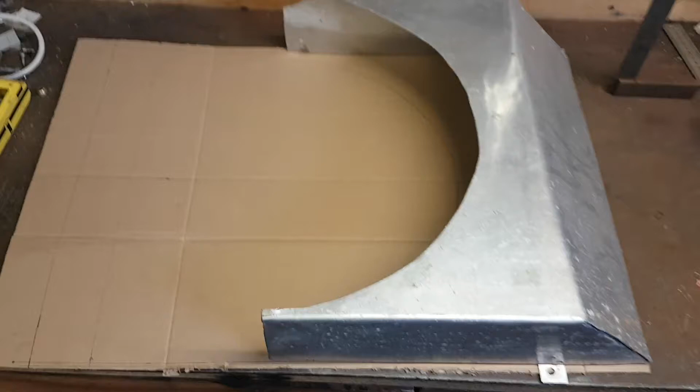I've measured the radiator up. The top of the core is here, and the bottom of the radiator is here, and the bottom of the core is here. The fan actually comes down a little bit beyond.

So this is roughly where the fan is based on the cutout on this. I just laid it on backwards. I might go out and see if I can get a better measure and draw on the fan, but I have a feeling the fan will go down below the bottom of the core.

I've got space, I can get down to here. That's a little bit clear above that - there's a plate at the bottom of the engine bay below the radiator that I've got to clear.

So I'm thinking this was my first attempt at a cowling, all dirty because I never got it to a point where I was satisfied to worth cleaning. When I did this, I had to bash this over the edge of this bench here to get a corner on it.

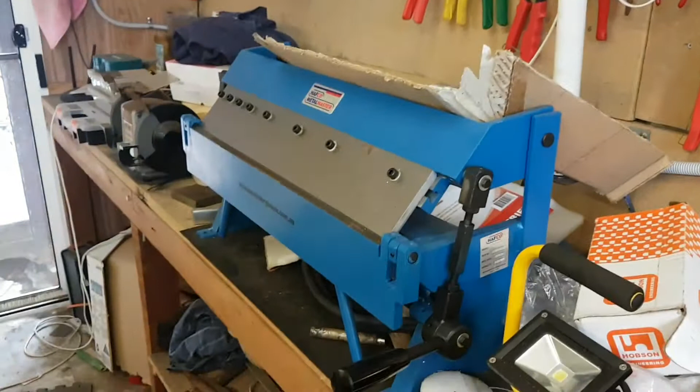Since then I bought that, so I've got more material, and I'm thinking I'll remake this and get it tidier so that's a cleaner line. It's not too bad, but it's not as good as it could be.

When I did this, I had to cut that slightly offset and bend this out a little bit, and I'm not quite sure why. But I guess there's no reason to think the fan is actually exactly on the centre of the radiator - that's just an assumption based on don't know what.

But now that was made, and that was necessary to get it to clear the old fan before I put a spacer on. So the fan has moved forward by probably 70 millimeters now, and so I'll have a rethink of this.

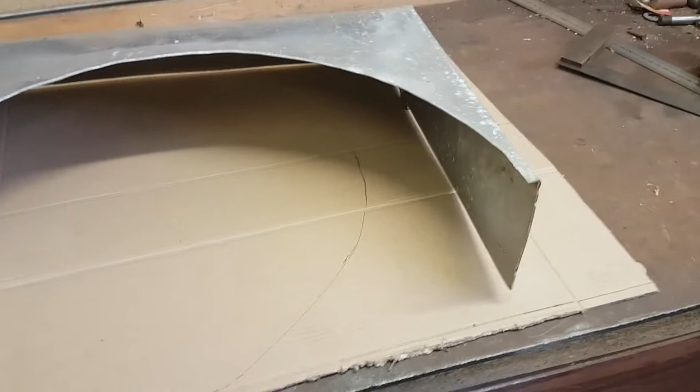I'll go back and check, because it might be that the fan comes past that edge of the radiator and I might have to put a little bulge on it, but I only had the top covered previously.

I'm not sure, it looked like it must have been doing something, because when I did the smoke test just then without the cowling on, it didn't seem to be anywhere nearly as effective.

So I'm not sure, but I will see if I can make a two-piece cowling so that I can enclose the whole thing and make sure all the air coming in is coming through the radiator and not from underneath. And we'll see if we can.

I checked and the temperature did get up a little. I think it warmed up quicker than when I had the cowling on.

So I'll now go and have a look and check to see where that fan sits in relation to the radiator, and I'll draw the fan position onto the cardboard.

So now I have a template, and I have here my cardboard mock-up of that, and I'll use that again, I guess, or maybe I'll cut another one because it's all a bit bent in the wrong place, and I've got some more cardboard down here.

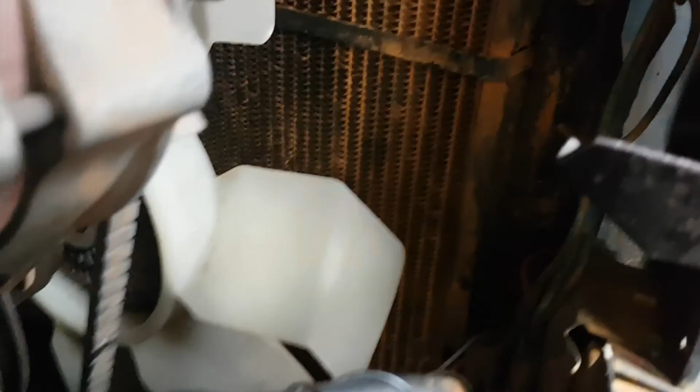I'll see what I can do to get a complete cowling. If we look on this side, there's maybe 15 millimeters clearance on this side, and we go around to the other side, and it is pretty well lined up with the edge of the core.

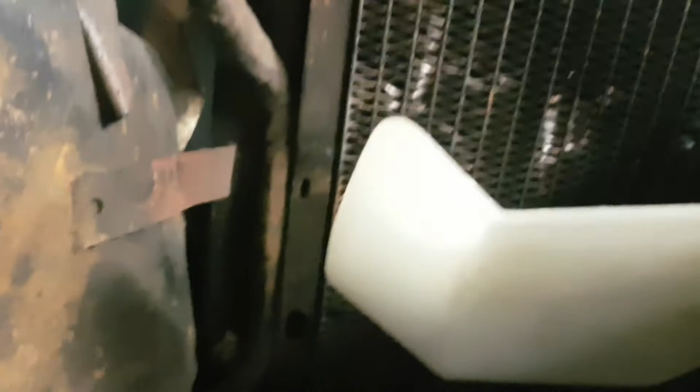It's hard to see, but it actually does line up. The camera - yeah, so we can see there, that's pretty well lined up.

And on the other side - got to get the camera lined up properly. It's actually about 15 millimeters in. It's hard to tell with this, but it is. It's about 15 mil in.

So that makes sense of what I see on the cover. I'll have to take that into account when I'm making up the new one.

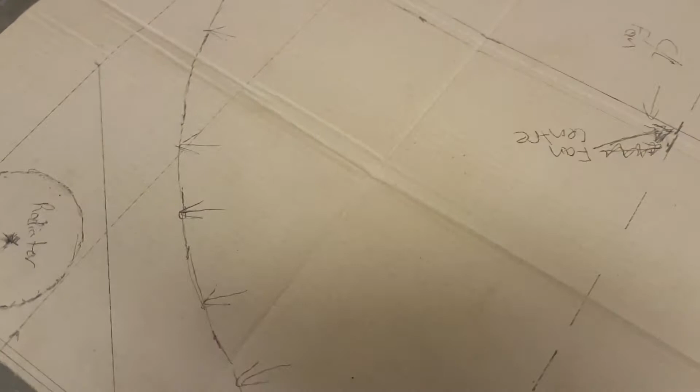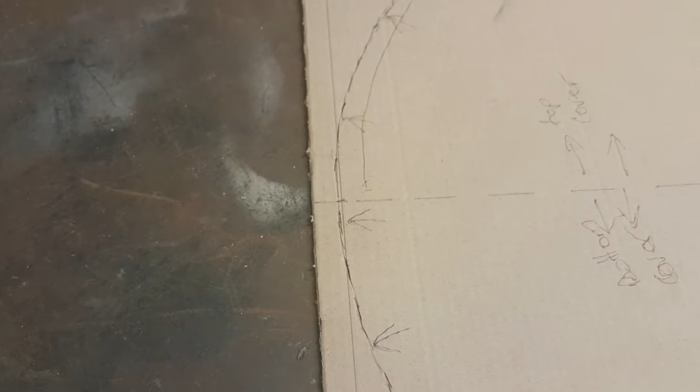The cover is sitting out 100 millimetres off the sitting back, 100 millimetres deep. So I'm looking at this, and if I come back 110 mil here and here and put a 45 on there and then follow that shape, that should be right. I'll have to be careful here, and I might have to make a little deviation out here to have the fan miss that. I think it pretty well lines up with that edge of the radiator, so I may have to give it a little diversion out up here.

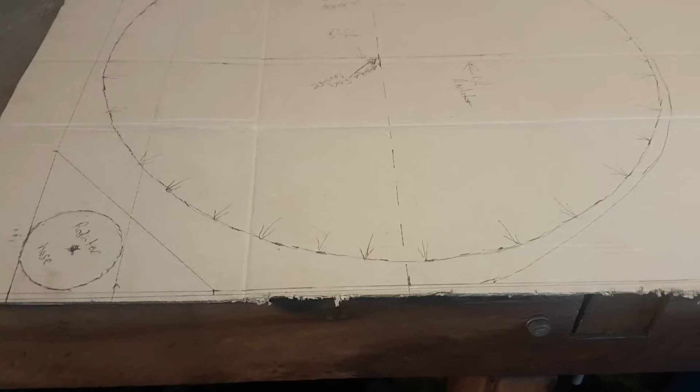This is easier to work on than trying to measure it all up in the engine bay. So I'll see where I go from here. This is the first run in cardboard.

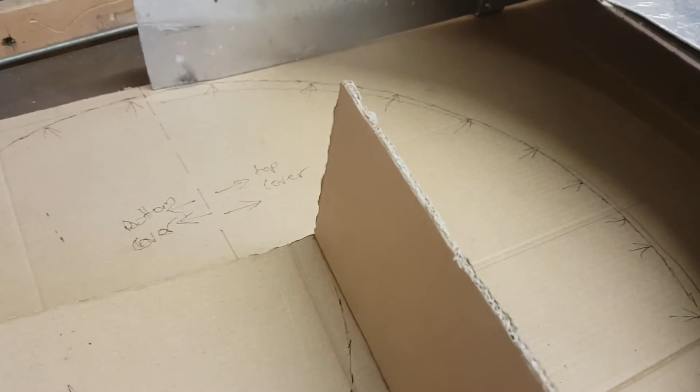That corner there takes care of the radiator hose, and I've got this drawn with the fan. It's pretty well touching the side here. I'm deciding whether I'll puzzle that out beforehand or make up this little piece out here, fold it out maybe a centimetre up here somewhere, or maybe one centimetre out, and then have a piece that just dog legs across, out, back and in to take care of that close clearance here with the fan.

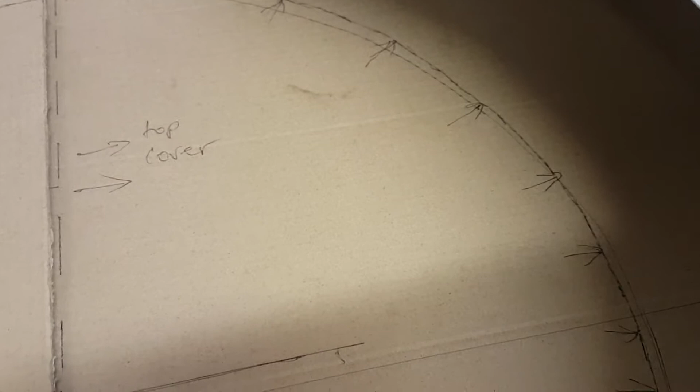But that looks like it's in the right sort of territory. I've drawn in the fan there. I'm holding off - that's offset. If we go centre line of the cowling, that's offset the wrong way because that's reversed. But that is looking like it's in the right territory.

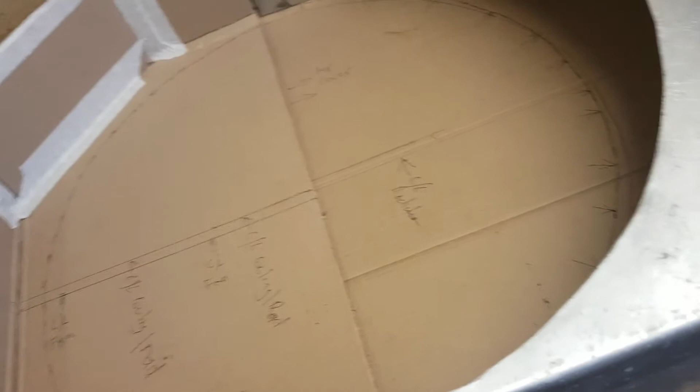So I'm nearly ready to start thinking about cutting some aluminium, and I am inclined to remake that. I've got enough material to do it, and I should be able to make a tidier job of it with this folding machine than what I did on this one. So let's see how we go.

It's a new day, and I'm sitting here looking at this and pondering exactly the best way to make it, because I've got to make sure that I can bend things in the right directions.

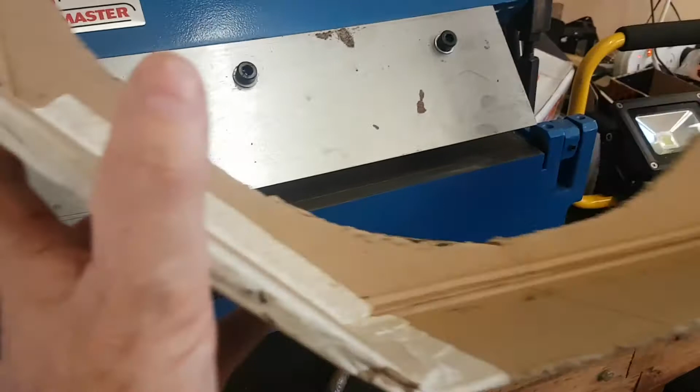So I might even remake or recut this in cardboard and try and fold it in the machine and see if I can come up with a way of doing it that doesn't involve riveting the whole thing together. There's going to need to be some rivets regardless of what I do, because of the way I've designed this - that's got an overlap here and an overlap here, and there have to be rivets in the corner here. So I guess it's a matter of where the rivets are.

That's going to be down sitting like that at the bottom of the engine, and if I do it this way, I can have no rivets in the front here. I would have rivets in the side there, but I've got to have rivets either along here or along here if I do it as I've done it here, or rivets up here if I rivet that in. So actually, I think I might do it that way.

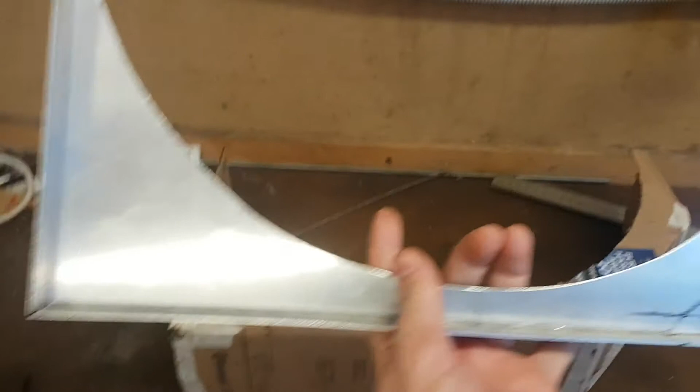The old adage, measure twice, cut once. I cut that corner. This had come up fairly well, although I forgot to allow for the thickness of the material when I was bending it. So I marked it out, cut that corner off, and it's the wrong corner. I can't see that bending that out and switching it around the other way is going to work - it'll probably break off. So I get to do it all again.

After a second attempt, I got this all together with the cutout on the correct side, and it measures up quite well.

Kudos to all those sheet metal workers, because trying to get these joins to sit right - and since you can see them even though it's under in the engine bay, I don't want great deviations and lumps coming out here and so forth.

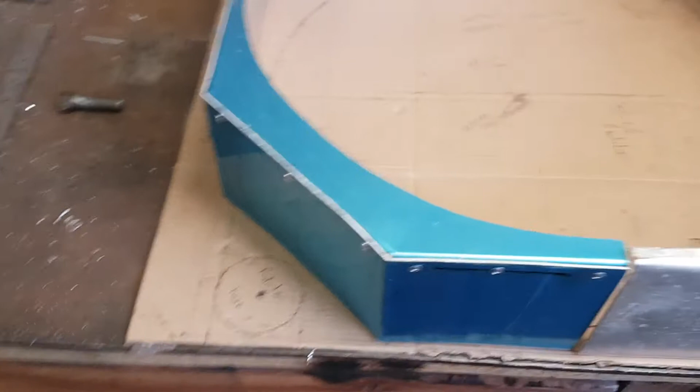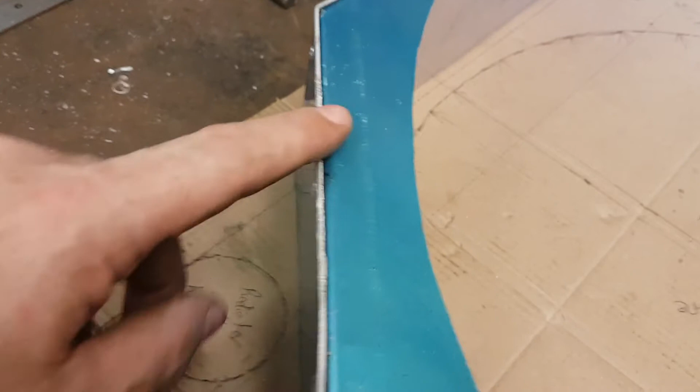Yes, it's not as straightforward as drawing a couple of lines and bending, but my little finger brake is showing itself to be quite reasonable. This job is probably about as big as you could get on it. It's 1.8mm aluminium, and doing this bend along here, you could feel there was a bit of force required on the handles, but it wasn't bad. It didn't creak or groan.

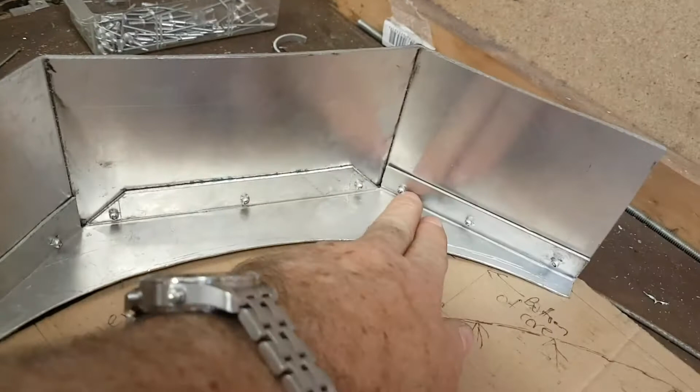I used the fact that this is a finger brake - you can remove these fingers - and if you're bending inside, for example when I was bending here, there's a lip inside and you have to avoid hitting those. So when you fold it up you need to have them fold out into a gap, and actually this worked quite nicely for that. You can see that it's a reasonably tidy fit.

I realised afterwards that I'd left this blue plastic on to protect it, which I don't mind, but I think I'll have to go around the edge with a knife to get that to peel out neatly, because there's plastic trapped inside of this gap here.

The height, I think this one's less accurate than that one, because I cut that fairly neatly at 100. I will have a look at what this looks like and decide whether I make this end again or not, because it's actually quite a big job.

I could do it neater, as you can see. This is definitely a neater job than this, but at the end of the day, this is not a show car. It's not a rat rod, but it's not a show car either. And I've got a list of jobs a mile long to do on the car, and I'm wondering whether making that top cowling again should be at the top of that list.

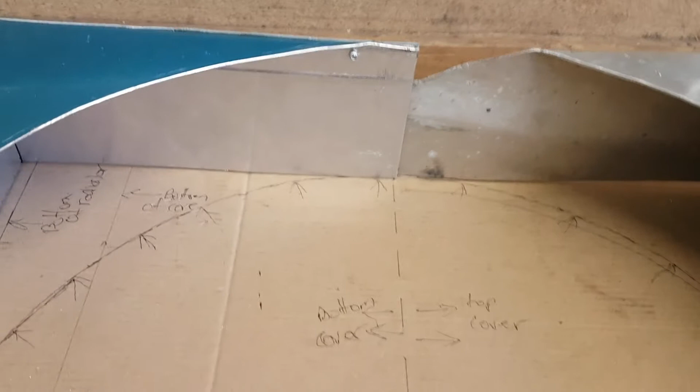I'm thinking that I might make a step out over here, just cut inside of there, or even on the other side of that if I need to, and put another rivet in, and step that out so it'll clear the fan, because in theory that should just touch it. So, I'll do what has to be done.

But second time's a charm. First time, I'm unfortunate that I cut that off. But actually, this is definitely Mark II. I learned a few lessons on Mark I, so it's a better looking end product.

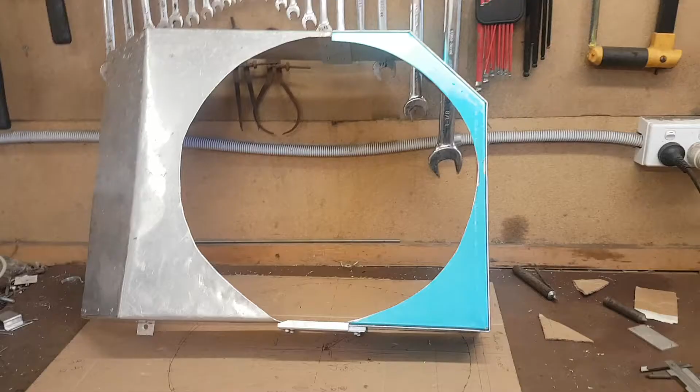Okay, here is the final product, I hope. I had to make a choice about this - that is 100mm here, and that is actually bent above 100. So I figured I'd stick with this because it's correct, and if I remake this, that'll tidy that up. But we'll see how bad it is.

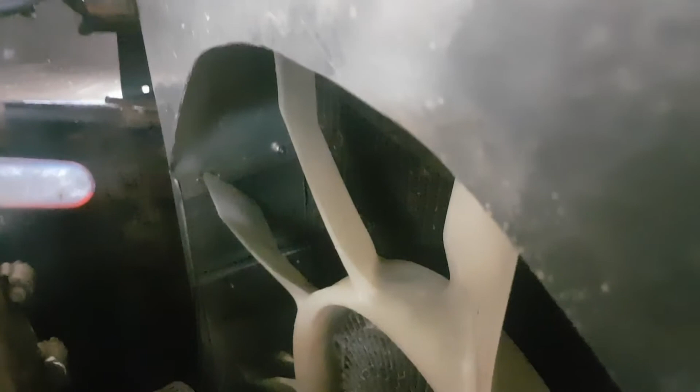Now I can try and put it in. Installed this - you can't really see it well, but that fan is just touching. It is actually just touching there, and it's really literally half a millimetre or something.

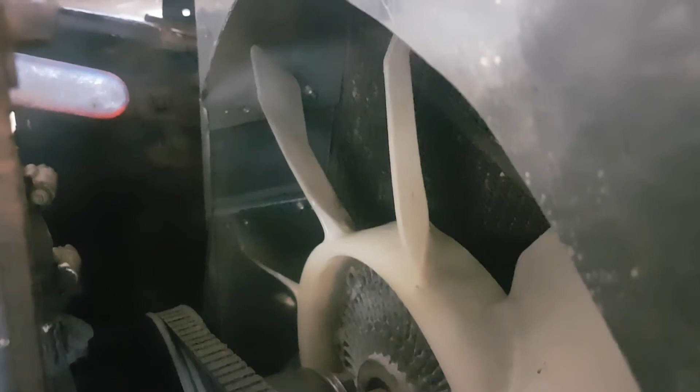So I'm going to have to take the whole thing out - it's just catching on that lip on the other side. So I'll widen that gap and make a new little panel for the side.

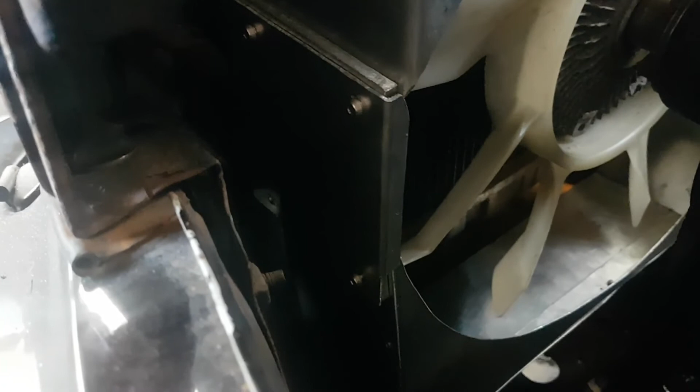We've got that panel there. I'll widen this maybe 20mm or something, and take it from there.

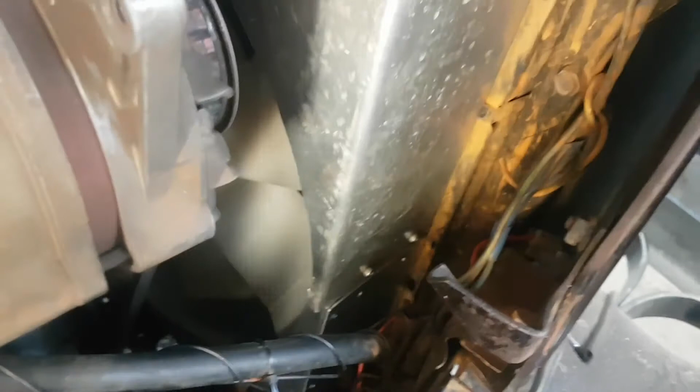Another thing I'm going to modify is this. This has just got a nut behind it at the moment, it's just a hole there. There's another one down low in the side of the radiator - that's how I've mounted it, and I was going to put one down there, but it's almost impossible to get a screw in down there, and certainly to hold onto the nut.